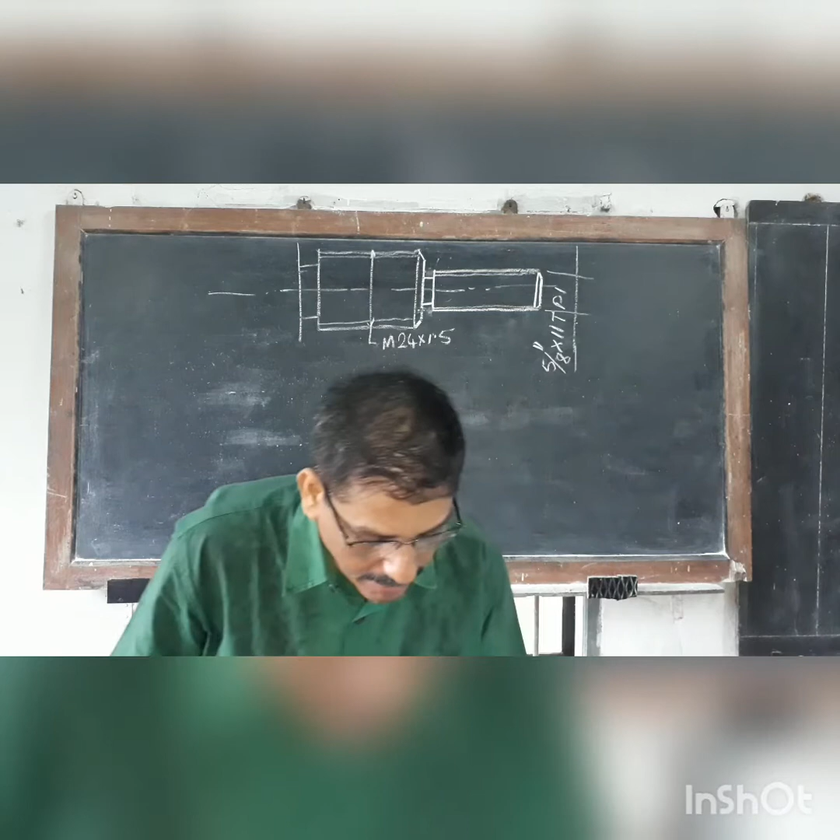So when you do British to metric, that time you will come to know. So now we will do metric thread in metric lead screw itself. So as I said the formula. Now I will tell which gears are available. Gears are available from 20 in one set. The first set is available from 20 teeth to 120 teeth.

120 teeth with a step of 5. Okay, 20 teeth to 120 teeth are in all the lathes. In all the lathes gears are available like that only. So whichever gear you need, any calculation you can do, no problem. So first gear will be 20 teeth, next with a step of 5: 25, 30, 35, up to 105, 110, 115, 120. Like that, so many gears are available in one set, with the step of 5.

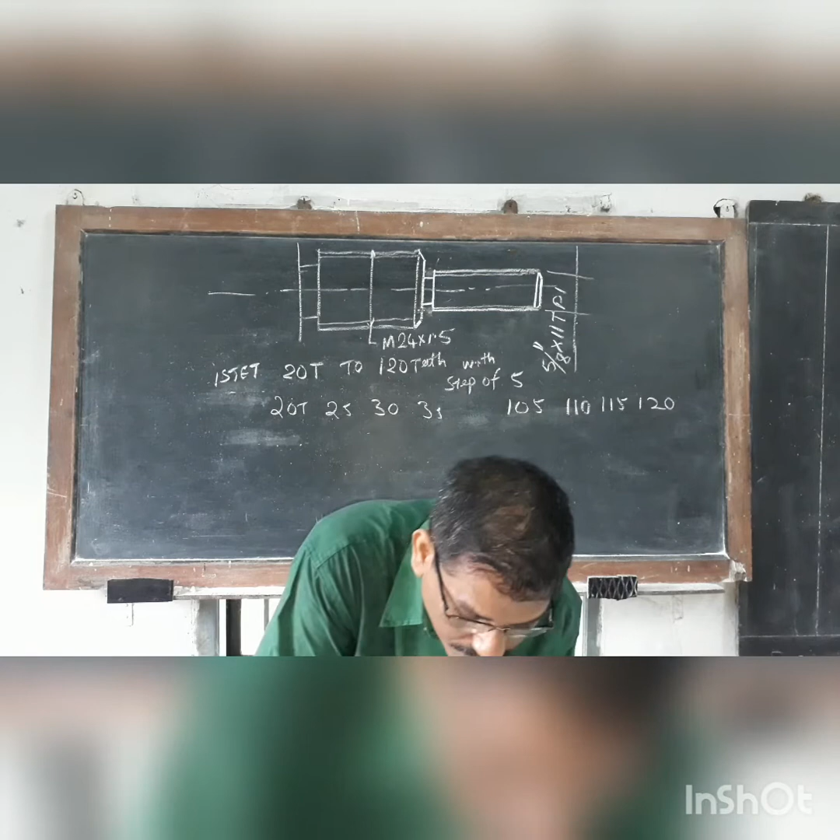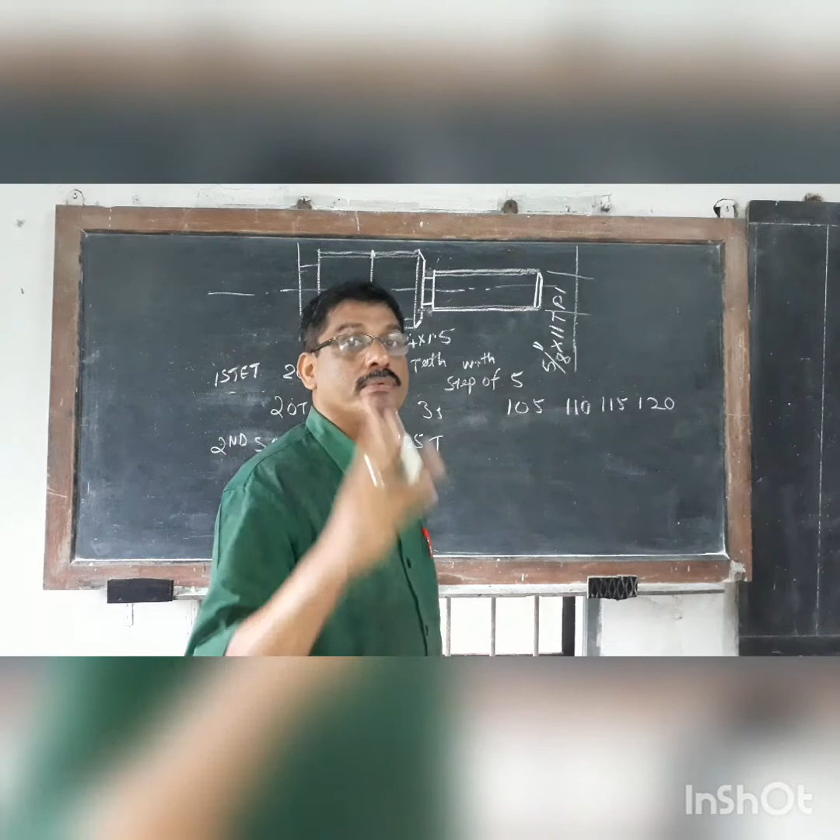Another set is coming. The second set is from 21 to 105. 21 teeth to 105 teeth with a step of 3. So you can calculate: 21, next plus 3, 24, next 27, next 30, like that with a step of 3. So like that the gears will come.

And in all the sets, in all the lathes, this is coming in the step of 3. So now you have to see the gears and you have to do the calculation.

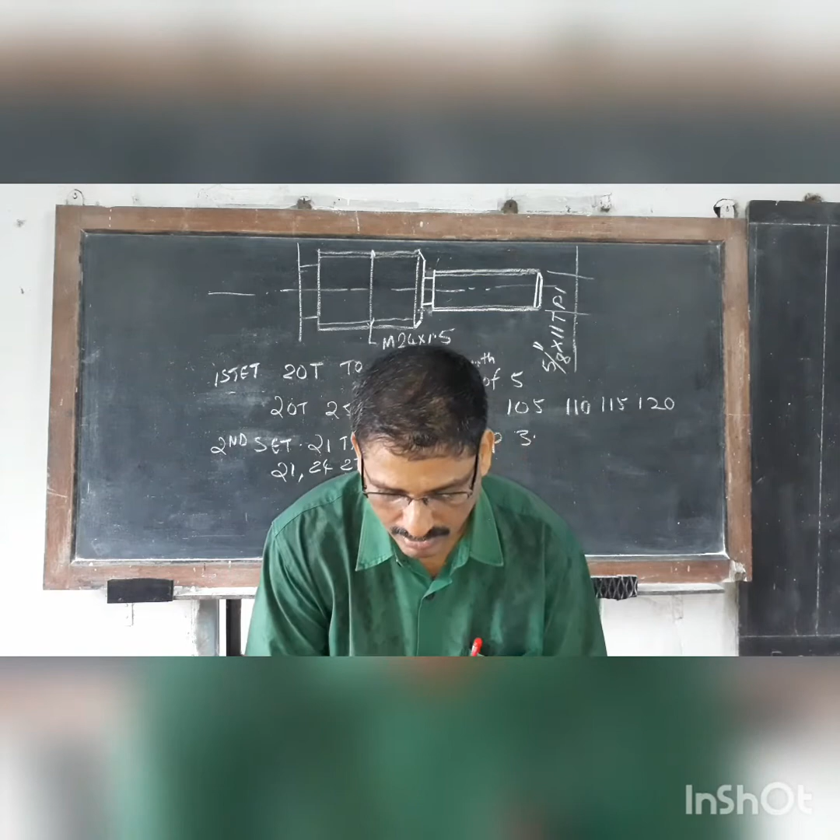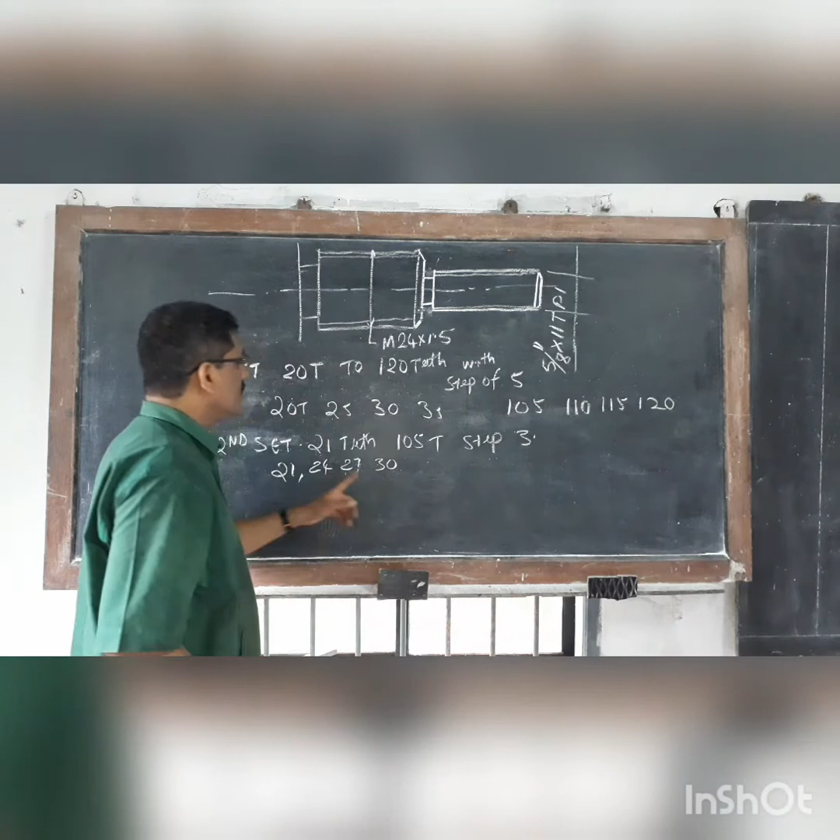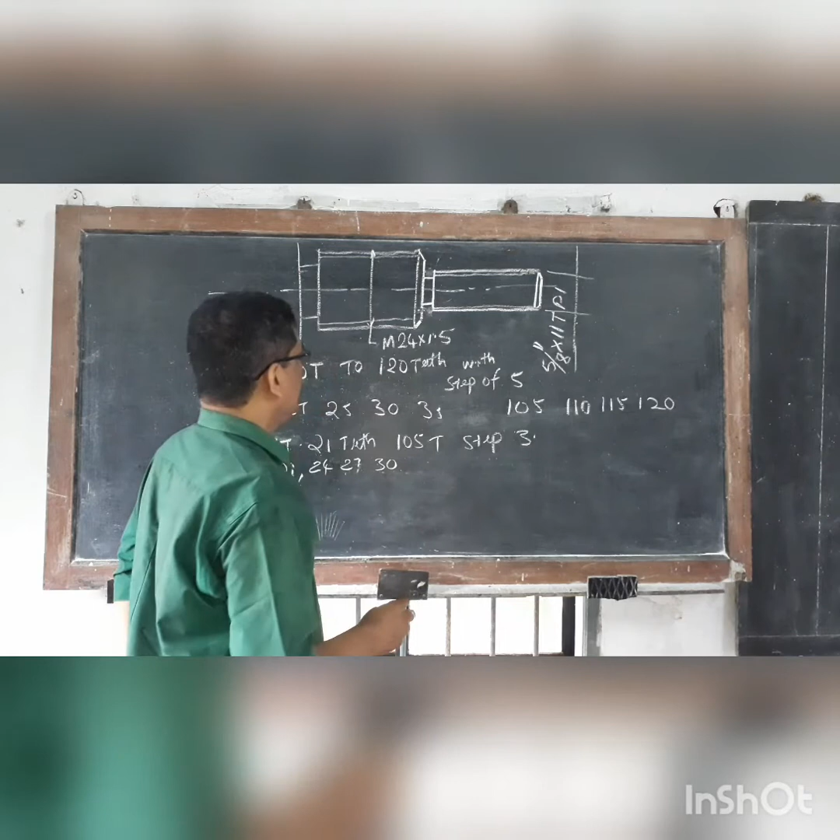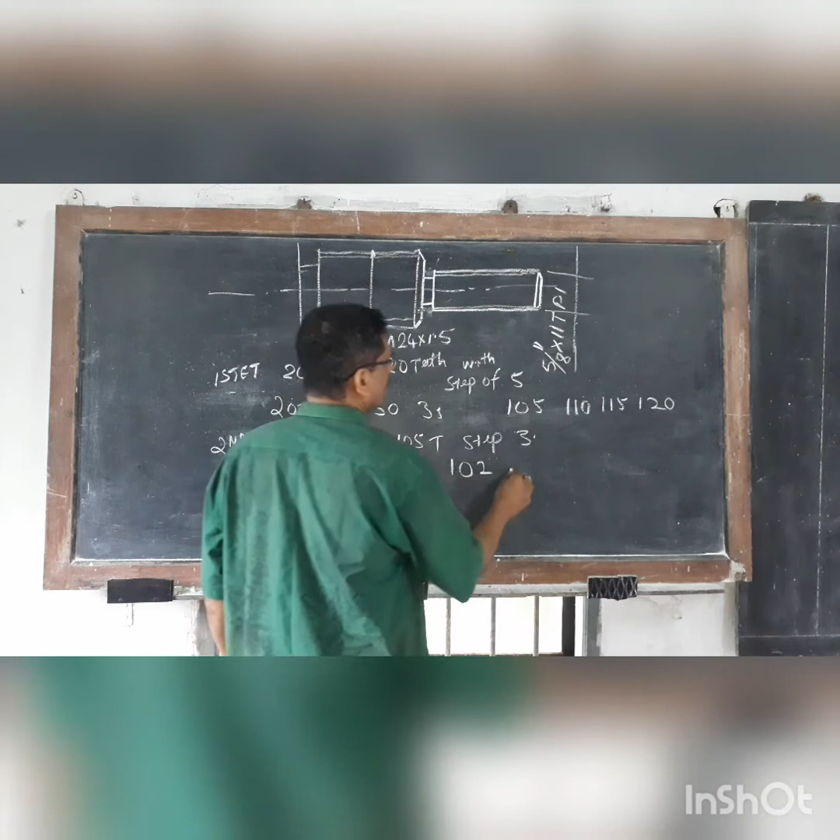So like that 30, and the last one is up to 105, isn't it? 105 minus 3, how much? 102, isn't it? 102 plus 3, 105. So like that gears are coming, and in all the gears there is one gear. It is called a conversion gear. Keep it in mind. It is called a conversion gear.

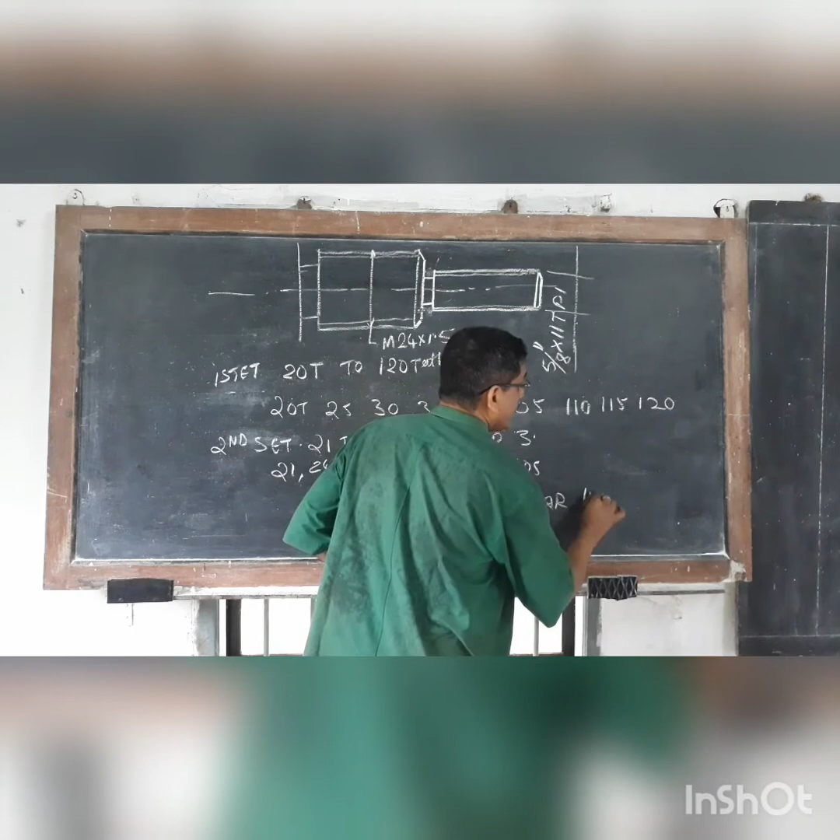It is of 127 teeth. Why is it required? Because it is only necessary when you do metric threads on a British lead screw, or else British threads on a metric lead screw, vice versa.

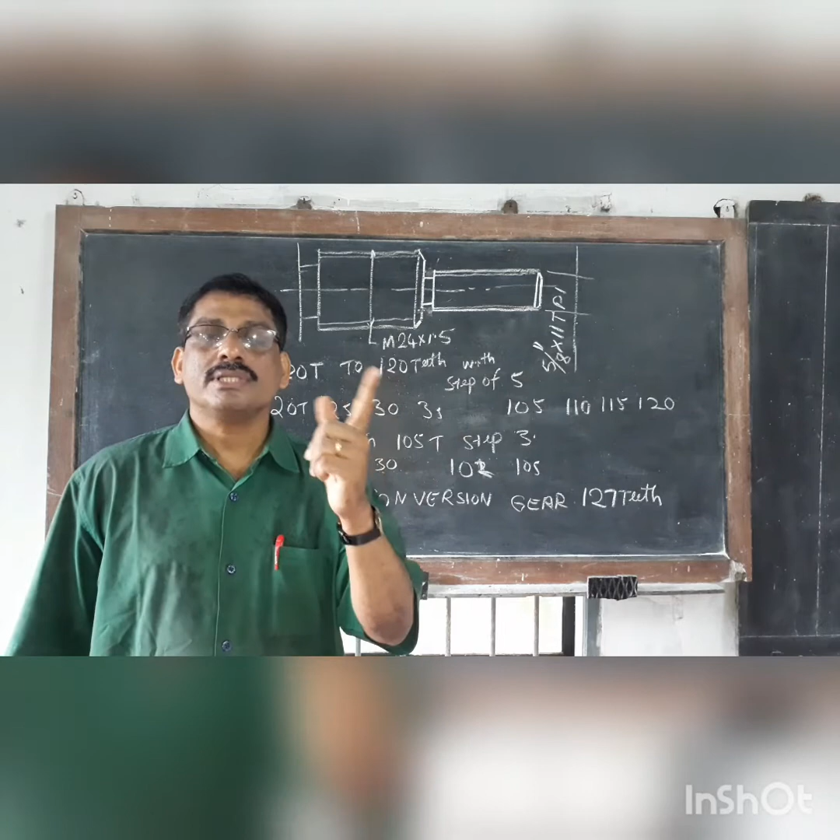That is why, because 1 inch is equal to almost 25.4 mm, isn't it? So when you do the calculation, I said your teeth should not be in decimal point. 31.5, 31.4 you cannot use at all. So what happens is 25.4, if you multiply by 5, it becomes 127, you see.

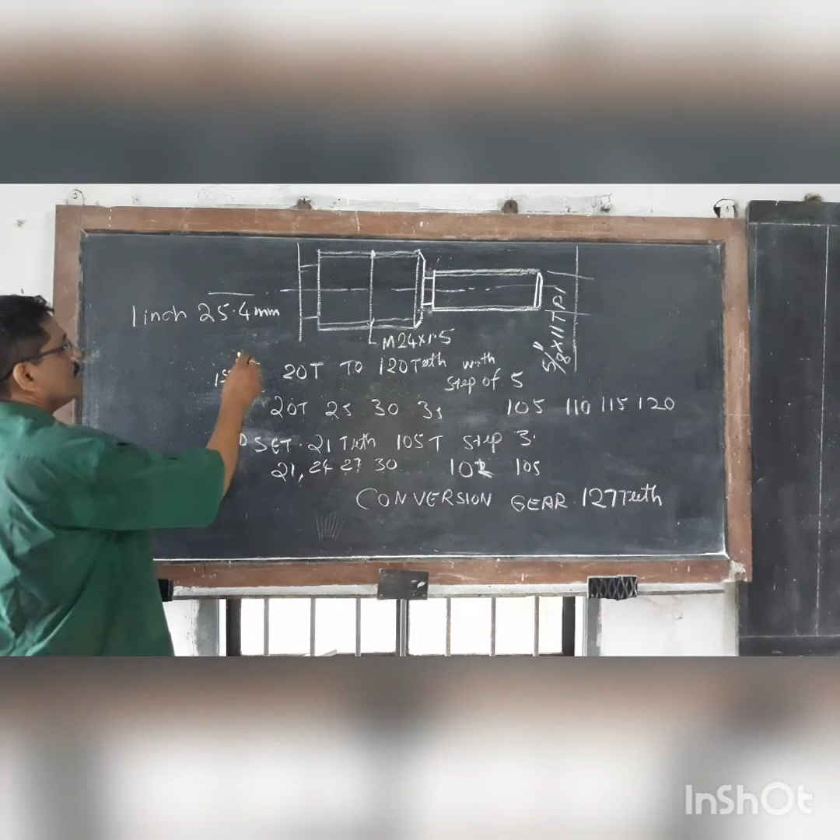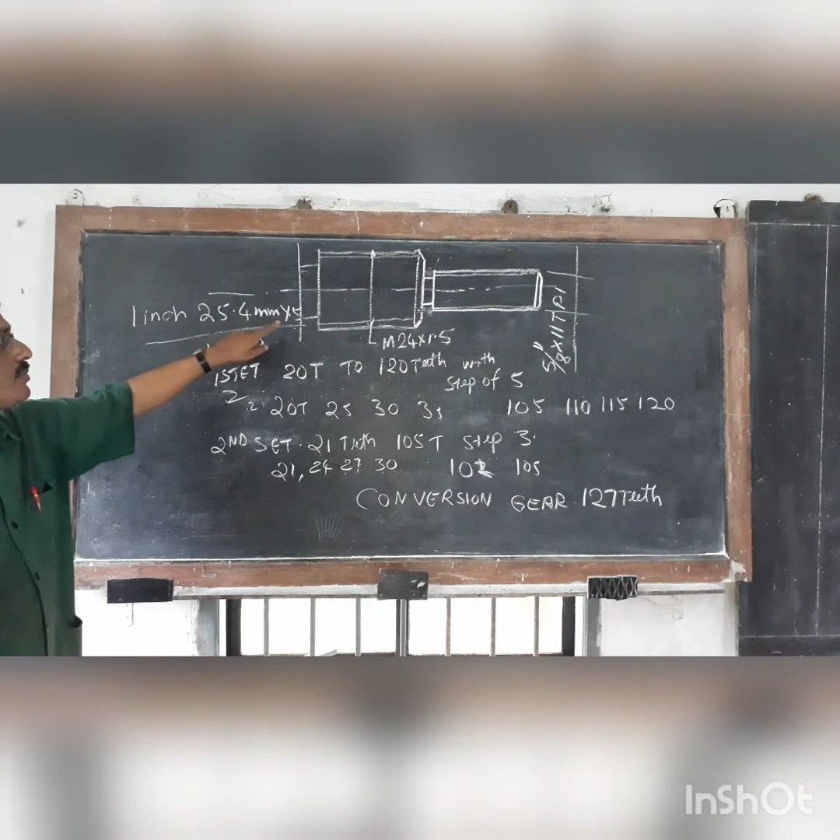25.4 into 5. So 5 fours are 20, then 27, then 12, one decimal. Okay, so it is coming 127, like that. 25.4 into 5 becomes 127. So that's why it is called a conversion gear. Keep it in mind. So now we will do one calculation.

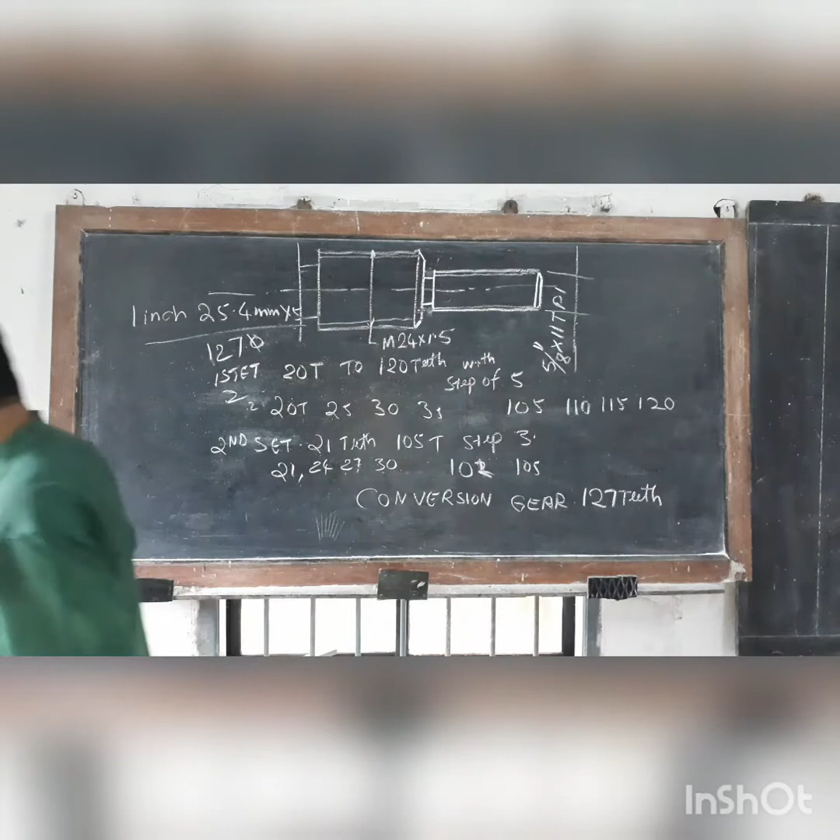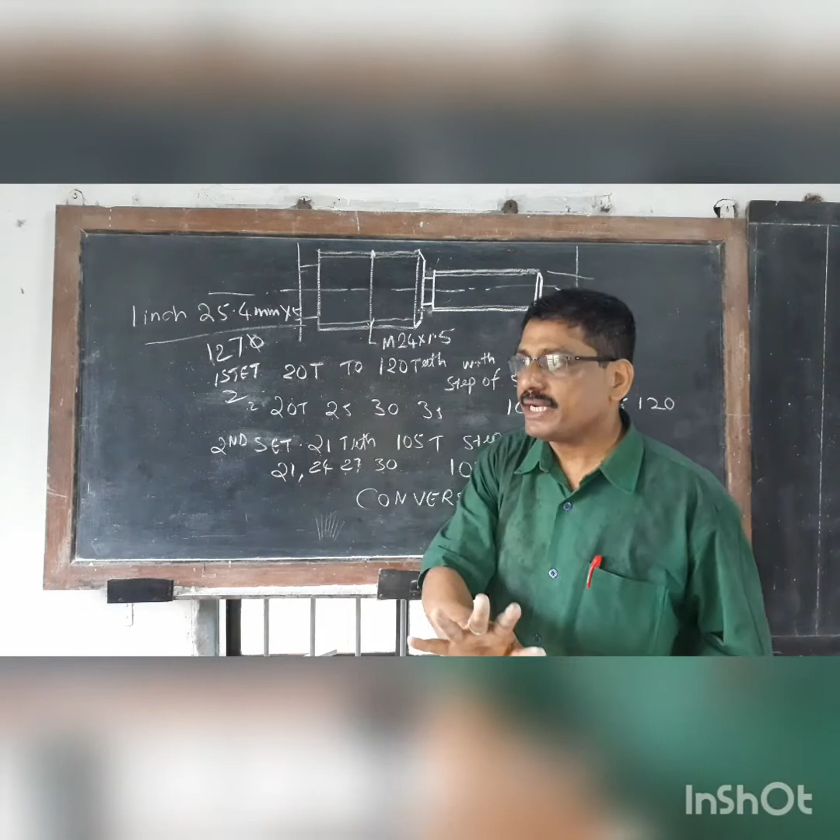Okay. So this I am going to erase, but all the notes are given to you. Go through it again and write it properly on the note sheet. This drawing also I am going to erase.

Here actually this is setting up pitch. Why is it important? See, you can cut 1.5 mm. Diameter is not important at all for us. 1.5 pitch you can cut over dia 24, over dia 20, over dia 10 also. Diameter is not important, but there is a standard size. So any pitch can be.

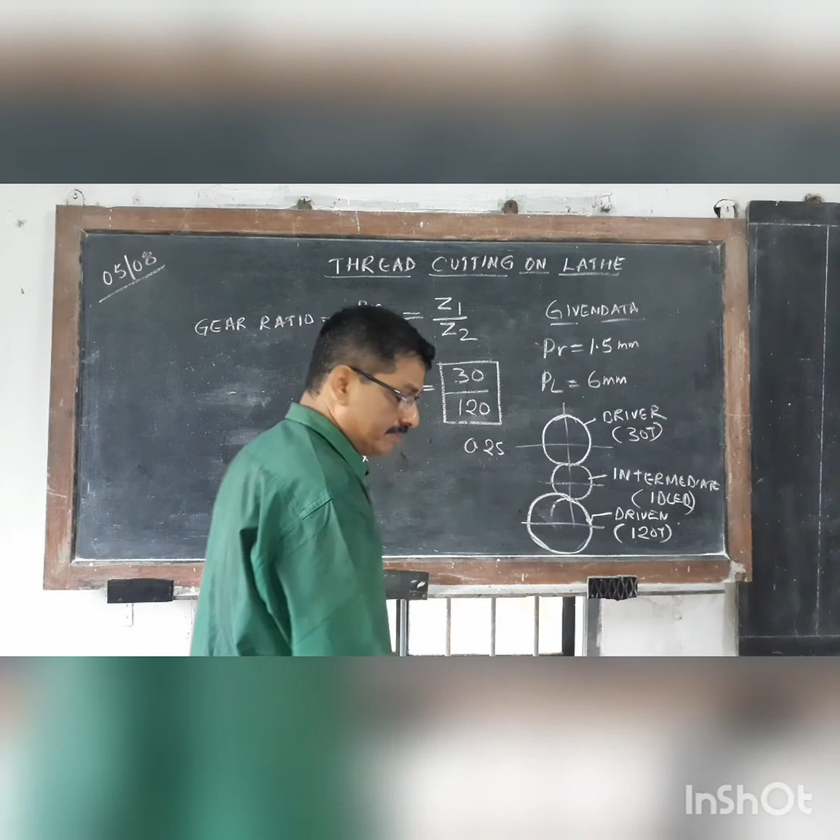1.5 mm pitch we will see. Pitch required 1.5 mm. Pitch of the lead screw is same, 6 mm. So now here you can multiply by...